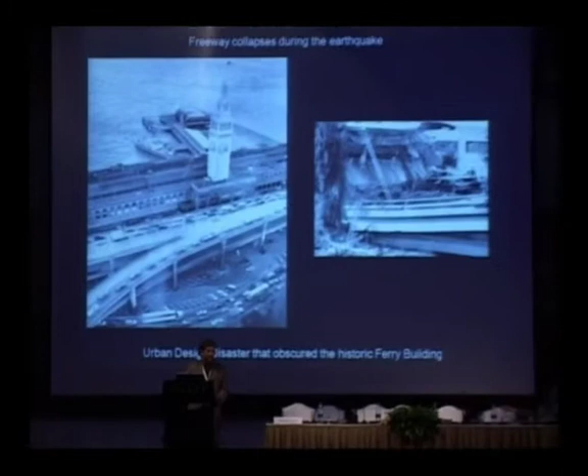And what really transpired was the area in the middle there, which was a series of elevated ramps, got demolished in the course of a planning process. It took a long time, 85. Citizens in the city really were talking about could they remove it, and then they decided that they couldn't remove it, but the earthquake was a precipitating event.

Columnist Herb Caen always thought San Francisco was one of those places where Manhattanization was a bad thing, and now we're looking back 20 years later and talking about very tall buildings in terms of San Francisco, clearly not in terms of what we would see here in Dubai, and so height's a relative thing here. You see in this diagram here over the four images the way the city's evolved in this height dialogue, and it's really been pretty dramatic, and it's really accelerated significantly in the last 20 years.

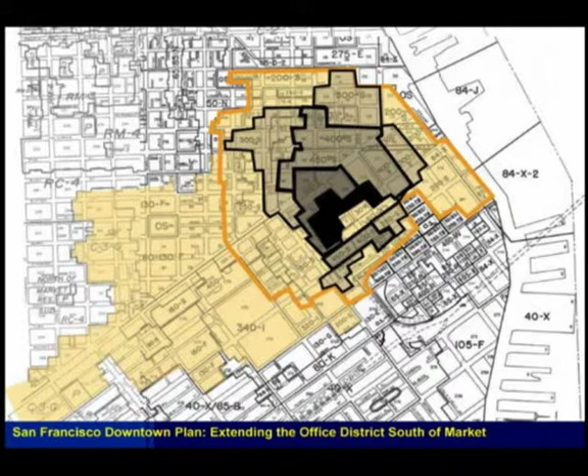The area that we're really going to focus on is the area around the downtown core, and the core discussion started in 1985 with the downtown plan. It was centered around that black area, and there was a desire to really move some of the development that had occurred north of Market to the southern portion of the area with the financial district. And the discussion then, as this ramp, which you see in the middle there, got demolished, two areas got created, and I'm going to talk to these. One is Rincon Hill, which John touched on, and the other one is Transbay.

So the first thing that happened was the waterfront got changed, the elevated freeway got changed, parkland got created on that waterfront. Pedestrian experiences were created, pedestrian was emphasized, and a lot of the pedestrian character that's really important to the character of the city, which is a city of only 800,000 people, a world city that a lot of people really love to come to because of its pedestrian character. And so the area on the left that you see there, again, is something that has not yet happened now, and we're about 1995.

So in 1996, the city began to think about a plan for both transit in the core of the city in terms of bringing mass transit there in a more significant way, and the development of two adjacent areas. One was Rincon Hill and one was Transbay. Two separate agencies actually, remarkably, were charged with two different parallel courses. One was the City Planning Department, who was charged with the review of Rincon Hill, and the Redevelopment Agency with Transbay in terms of the ability to get revenue for that area in terms of its development.

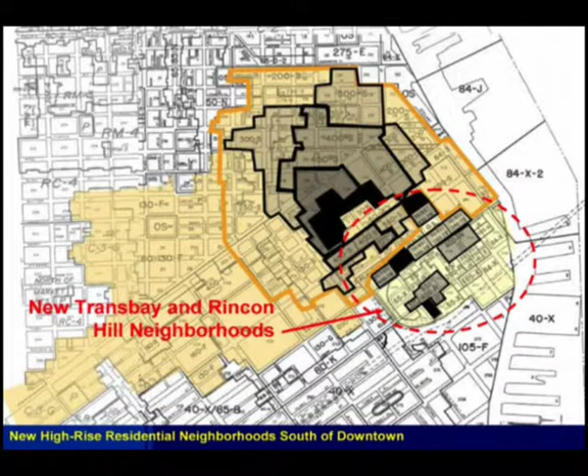The area that's in the red zone there is the Transbay and Rincon Hill combined areas, and you see actually that it's now south of where the central core of the commercial district was evolving, and so it was seen as a new residential enclave. Two dots there, and I'm going to touch on the two projects that precipitated this, and they actually were prior to the ones that John's firm were dealing with because they were done before the zoning for Rincon Hill actually started. We started this project in 1999, almost 10 years ago, and the project's actually finally coming online.

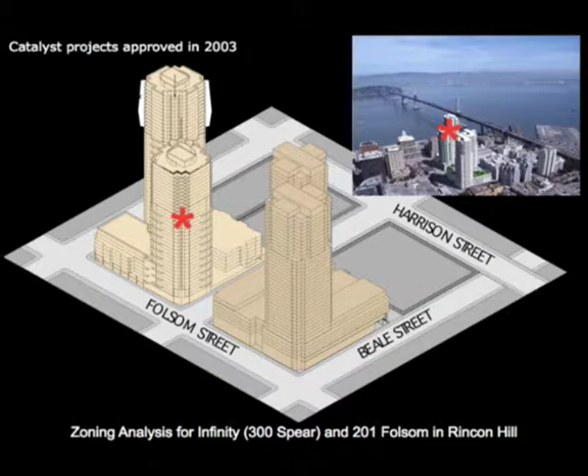And the desire to increase heights by almost twice, from about 200 feet to 400 feet, was really seen as a very difficult discussion for the community. I spent 80 community meetings in the course of a 3-year period going around the city talking to people about why it was important. A lot of them understood, a lot of the environmental community understood, but they were still concerned about the desire to increase that height.

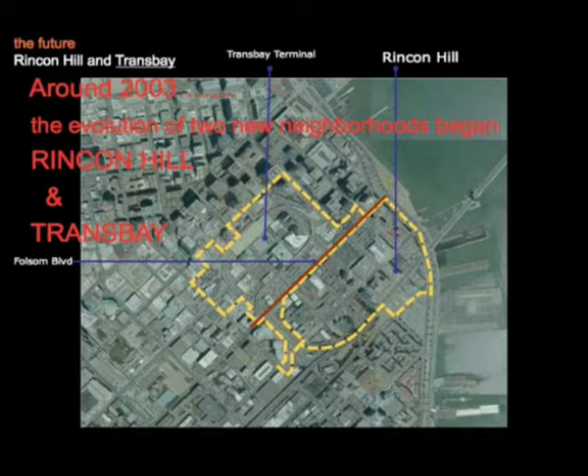So now we're at about 2003, and the redevelopment plan and the Rincon Hill plan became much more of a public discussion, and these are the areas that John had touched on that were part of this discussion, and they were important to this dialogue. This is the area as you saw it before the development occurred.

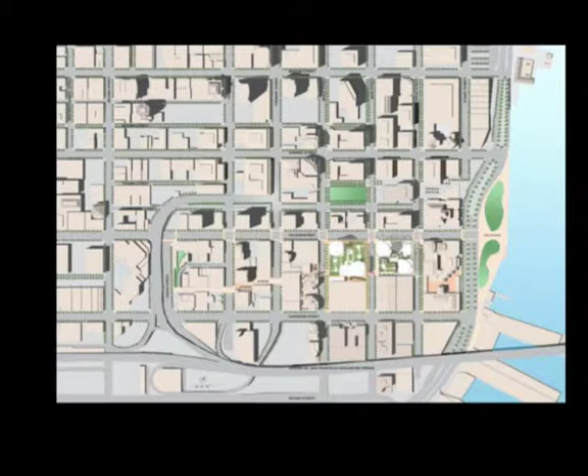This is actually what's begun to happen here, and the areas that begin to see is the development of parks, the creation of a retail boulevard along Folsom Street, which runs to the waterfront, and the development of several residential projects. Three of them, Millennium, Infinity, and One Rincon, are the major projects that have actually started in this area.

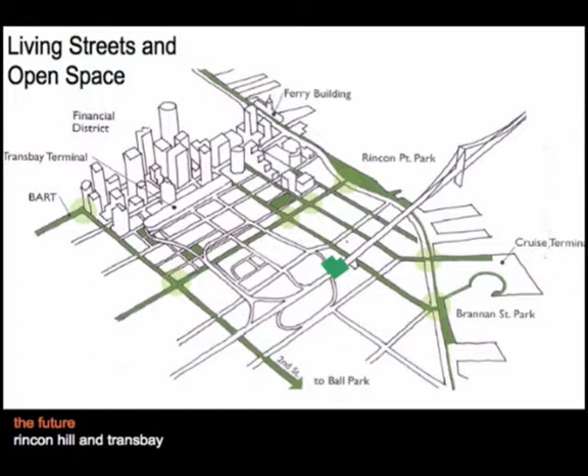So again, Rincon Hill, you see the rendering on the right that the area was focused on. It was part of the vision of the city. This is that creation of that boulevard that actually ran down to the waterfront from the area that was west of the commercial district, the creation of living streets and open space. That was an important part of what didn't typically occur downtown. This was a change in the mindset that actually people could live downtown and create a new residential enclave.

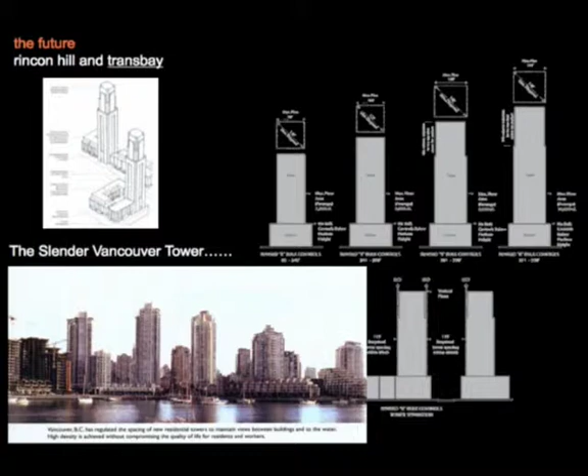And then one of the discussions that actually occurred early on was the discussion about the size of the buildings and the floor plates. Planners in the city actually felt that the Vancouver model was something that was important to do, and you see the massing and the size, but they were very thin buildings, which is really a difficult thing for developers, as well as a very difficult thing to accommodate in this development of this performance-based structural system, which Ron touched on. And this project, Infinity, was actually the first to use this system and the first to be constructed. One Rincon benefited by this because we took a lot of the effort here.

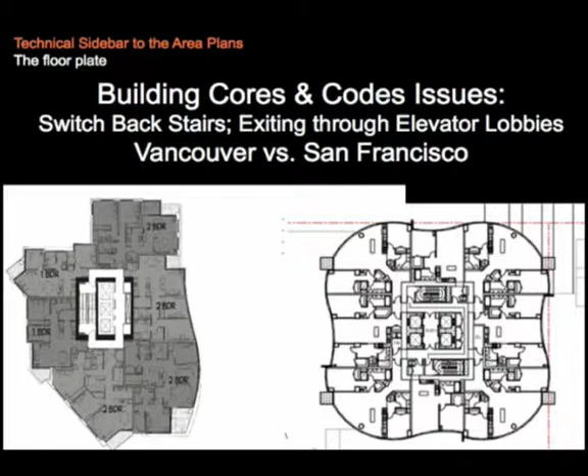And the diagrams that are on left and right, one shows the Vancouver model, which permitted switchback stairs and exiting through elevator lobbies. The San Francisco Code did not permit that to happen, so therefore it meant that the floor plates actually were bigger than they could be if the planners were actually looking at the Vancouver model. They didn't quite understand that the building codes were part of that discussion.

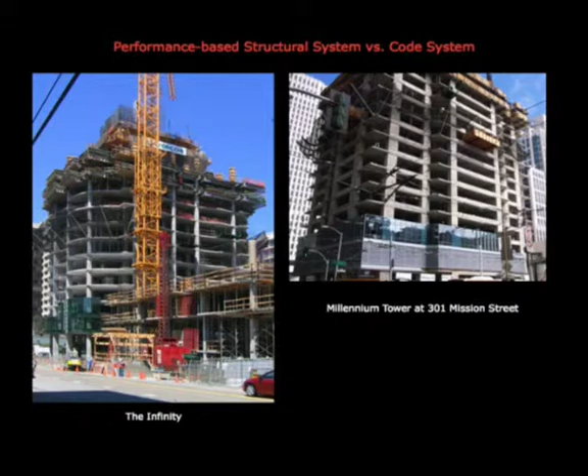This was also the comparison that I think is important that Steve talked about here, the Millennium Tower and the Infinity Tower, about the perimeter beams. Ron and I had worked on a project much smaller in scale, 240 feet in height, that had no perimeter beams. And I felt in the course of the development of this project that it was important that we did not have those perimeter beams. We wanted the greatest flexibility that could occur. And it took almost 3 years for the building department to actually understand and give us a yellow light about the approval of this project.

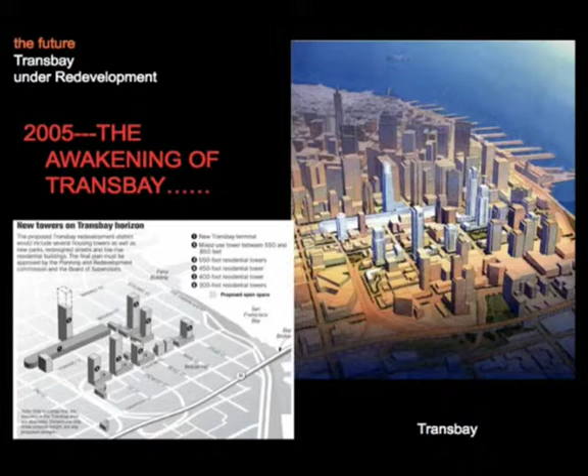Jeff will touch a little bit more on this in terms of the development of Transbay and how it ultimately will evolve in the changing of this area. And so we're at about 2005, the importance of the streetscape that we talked about. And now we've sort of advanced the discussion. The height is a better thing. The development of this area is important. And now the city's in the process of looking at bigger and taller buildings.

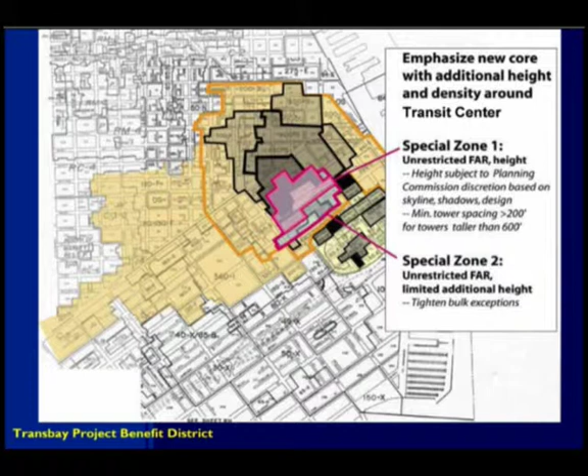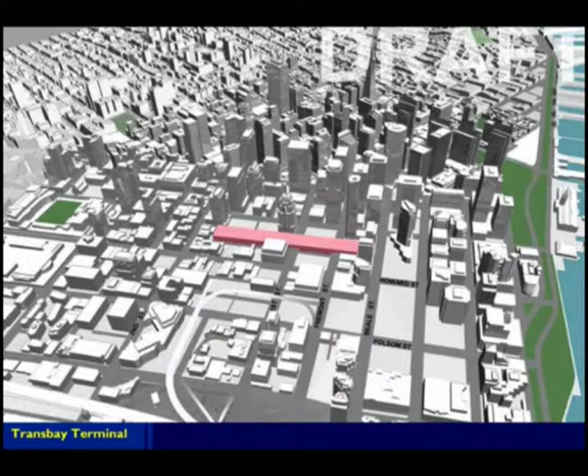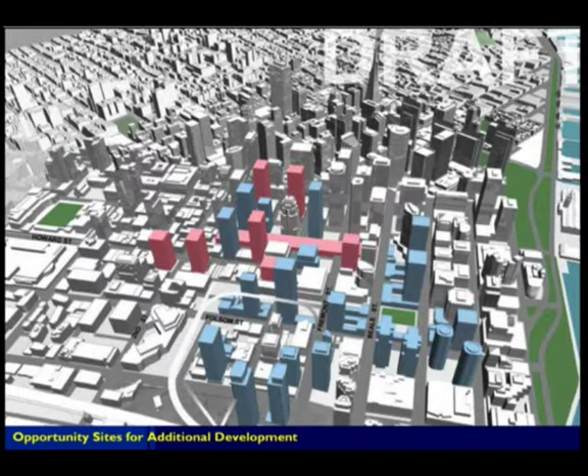Jeff will also talk about the transit tower that's a part of this discussion, a competition that was recently won by Hines and Pelli to build a building of probably somewhere around 1,000 feet. So that's a big change in the mindset. And you see this form of the building and the tower. This is really that sequence of images which I always thought was important in terms of the way the city began to think about the development of the base, the entitled towers, the proposed Transbay towers, the opportunity sites that they thought for development, and ultimately a balance of what they thought the development is.

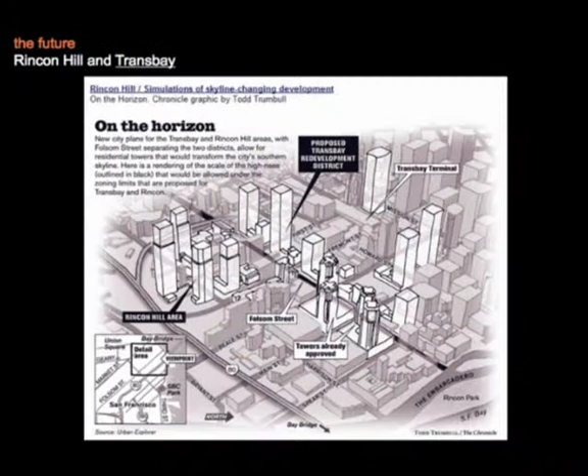So in the course of what I would describe now as a 20-year process, from the removal of an elevated freeway to development of increased density in the core of the city was actually very important. So the city followed the intent, and I just want to go back to the thing that John talked about, which I think is really important in the way the city is seen: suburban versus urban.

The density on the Infinity site, which I'm going to talk about, is 660 units to the acre. And so if you compare the single-family house, it's significantly better, and the city is now beginning to attract a lot of people in this area.

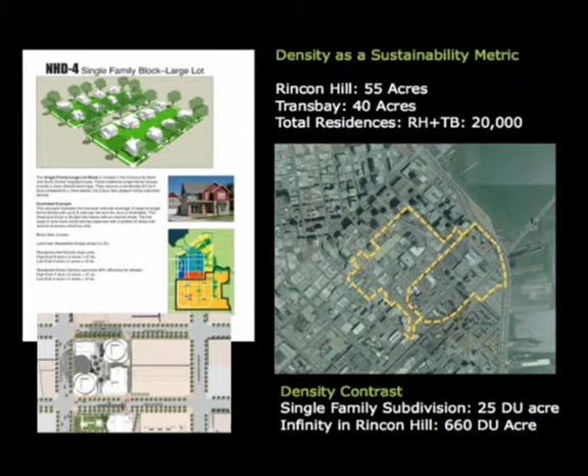So this is a little discussion about the Rincon Hill area in Transbay, what has occurred in the area. You see how many of the open lots were there prior to the development. We're just sort of working our way around it. And this is a series of animations that the city developed looking at the key vantage points. So this is the baseline.

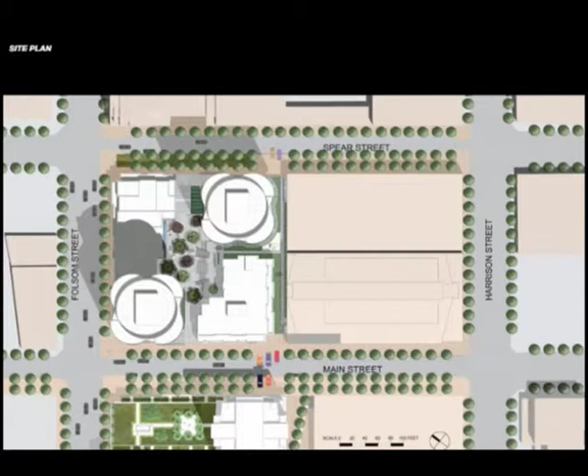The Infinity Tower, which I'm now going to touch on, is one of the projects that is a part of this, and this is a shot taken from One Rincon on a visit that Jeff and I had the opportunity to make. It's a 660-unit project, about the same scale as One Rincon. Two towers, two mid-rise buildings, an open space in the middle of the courts, and five levels of parking below grade. Very, very dense project, very unusual, very big for the city.

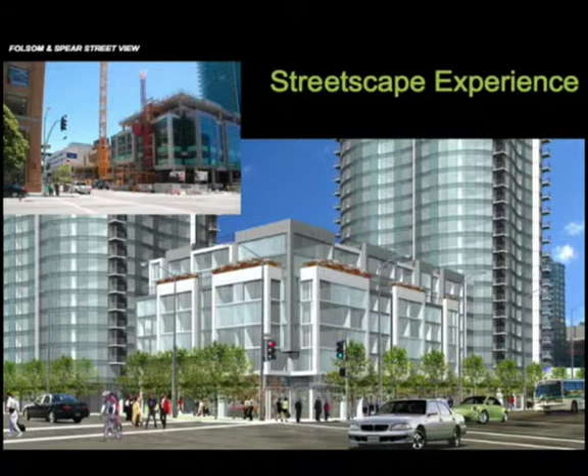And it allowed, as you can see, the use of this curtain wall, which gave flexibility for the unit configurations. And you can see the character along the street was really important to us in terms of the way people moved around the site. This is one of the ground floor plans. This is the courtyard plan in the middle, the way the space is created between the buildings. And then some views from the streets and the in-progress construction site, and a view looking down Folsom Street. Remember, I was talking earlier about that view.

Next thing I just want to touch on briefly, which I think is a really important part of this Congress, is sustainability, what ordinances are about and why incentives are really important. We heard the presentation earlier about Chicago. San Francisco is seen as the #2 city in terms of green, and what has been interesting is watching land use zoning create the ultimate goal of what sustainability is about.

In the last year, the city and the mayor put together a task force of community, construction, architects, engineers, and people who could provide insight into what sustainability meant. We'd always been on this course to making it a sustainable city, but this is a concrete example of where this implementation could occur.

So when you look at this chronology that goes back to 1997, each one was about the way the sustainability plan occurred, and the most recent one provides incentives for private sector owners to decide to do their building as potentially LEED Gold. The incentive legislation is in the process of being considered by the Board of Supervisors. The intent, obviously, is to reduce greenhouse gas emissions as well as primarily energy.

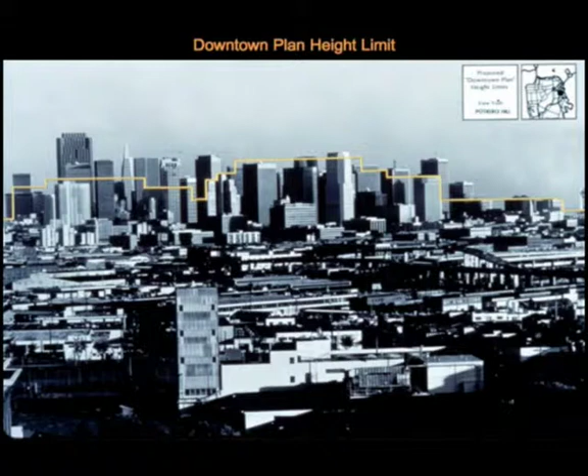Its zoning over the last couple of decades up to now has been about preservation of what's there. The project that Clark talked about, which was the Infinity, done by our office with Arquitectonica, was a ferocious fight over a 400-foot height limit. And as you'll see, that height limit became quite irrelevant when the idea of sustainability of the planet became a more important issue than whether or not your backyard was imposed on by somebody else.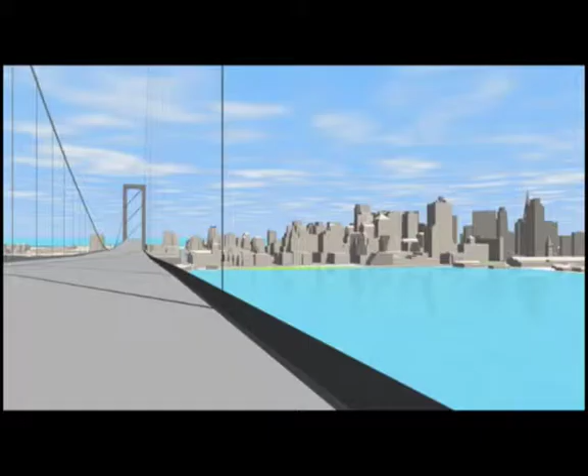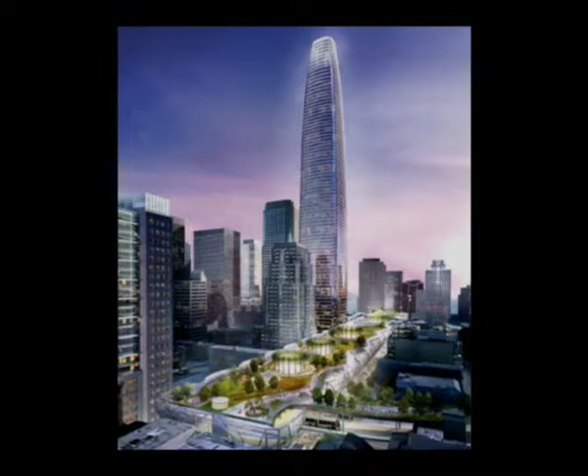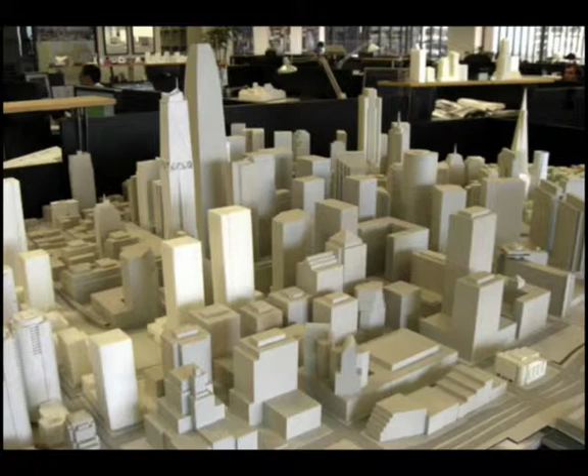So the studies in the city, which first were here, now contemplate taller buildings, and you'll see taller yet. And it's because of the notion of sustainability. The Transbay Plan itself, which was like this, is really quite modest in light of what has now happened. And we have here a 400-meter building by Hines and Cesar Pelli, where before 600 feet or 200 meters or just below that was contemplated. In our office, we have a model of all of this, and you can see that the scale is jumping in San Francisco, and it's about, again, high-rise and quality of life in urban centers to help preserve our planet.

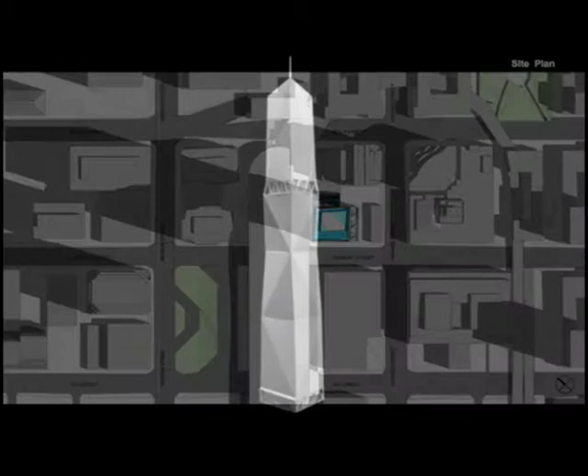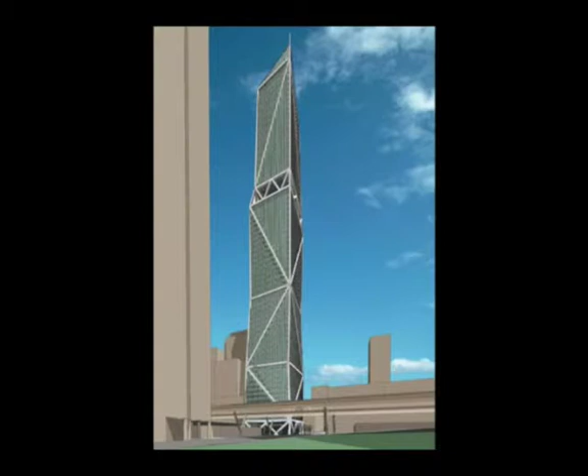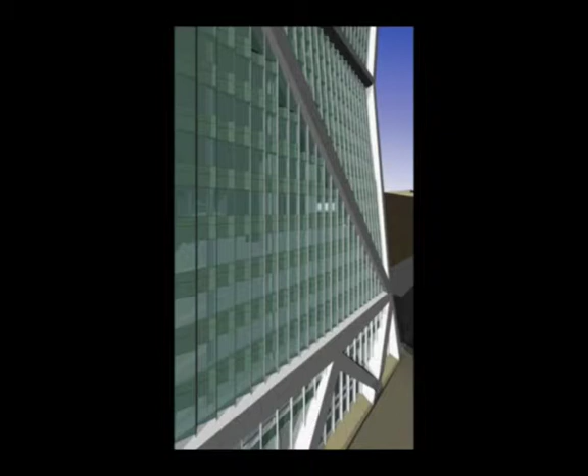Now, this is a fairly recent project by us. This is about 300 meters tall, and it's right near the Transbay Tower. And the idea of the project here is that it steps down from the Transbay in urban design to create a transition. And here it is immediately south of the Transbay Terminal itself. And the concept of the building is an exoskeletal building. It's a seismic zone. It's a very small floor plate. So we're expressing the structure on the outside of the building in order to have column-free space inside. It's mixed use, probably office with residential above, perhaps hotel also. And to emphasize the exoskeletal structure, we have this subtle shifting of the planes and surfaces of the building to give a bit of character to that structure.

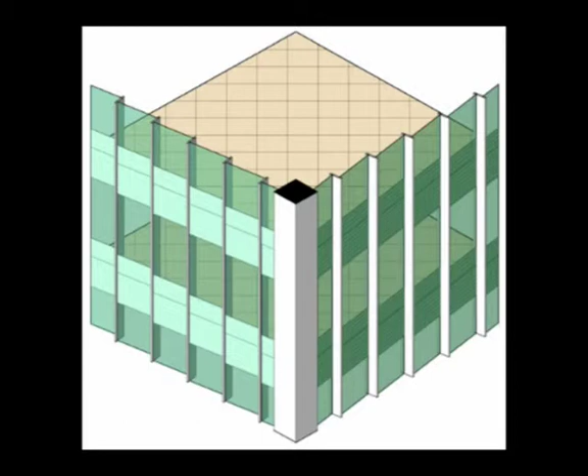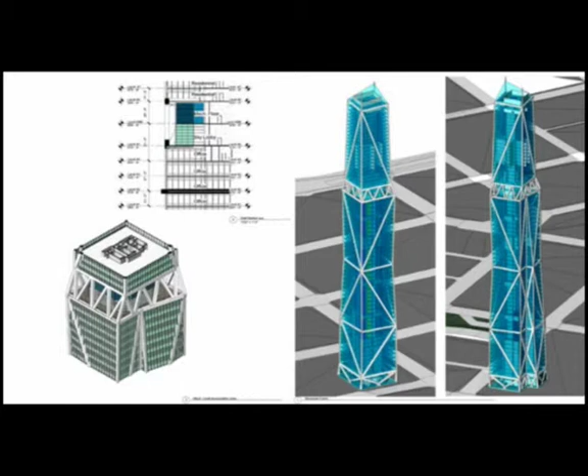The other idea we have going for this building is that we have a serrated wall, and the reason for the serrated wall we've designed is that the sun strikes the mullions to a higher ratio than the glass, and this we've calculated to save about 6% on the energy for the building. And we also are taking advantage of some of the recent wind studies, so we create a funnel through an amenity floor to break up the wind currents and reduce the stress on the building and do some wind turbines. And here you can see the way the plan transitions through the amenity floor from the base to the top, the middle of the building at the amenity floor.

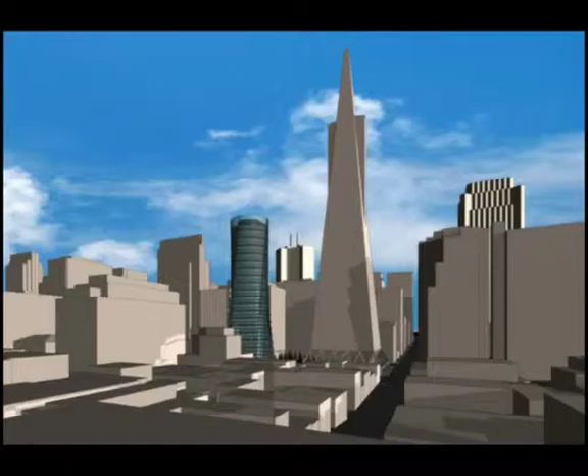And then one last quick project. This is not so tall, but again, being very respectful. It's on the right there near the Transamerica building, and yet creates a whole series of sustainable statements in a residential tower, which does a quarter twist as it transitions from the bottom to the top. And you can see the way the geometry created works fairly sensitively with the edge of the Transamerica building while not mimicking the building. There it is in its context.

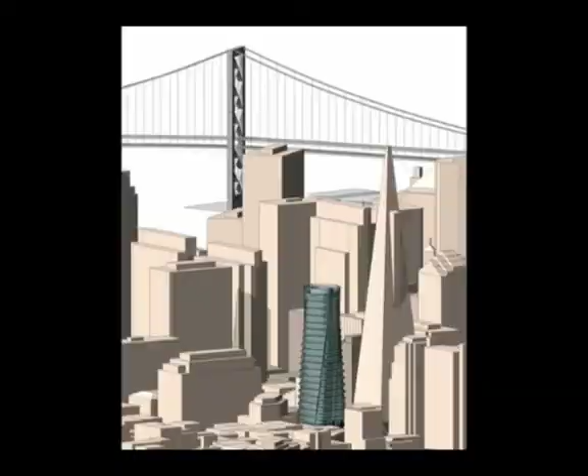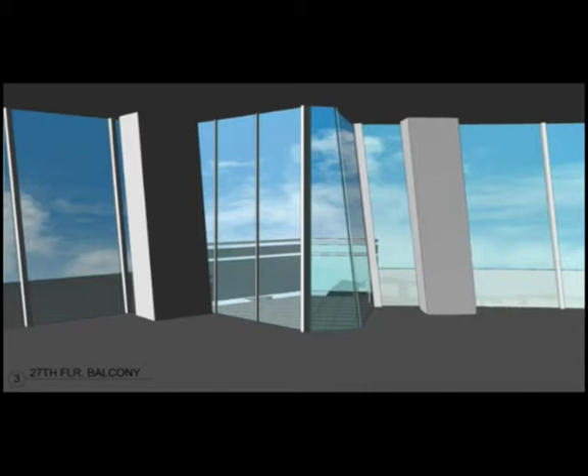And here you see the way that transitions from the square to a round, resulting in a building like this, which means that the park space is kept quite open, the sunlight is kept quite illuminated, and creating interesting geometries from the inside looking out, where the vertical glass is where the doors to the balconies are, but otherwise we work with the geometry of the idea. These are some studies of the building in context. As Tim mentioned, this is a very contextual city. And then in the park, we open the park up more because of that.

Let me just go back to this, and I'll close there in the interest of time, and say I was talking to our colleague Igor Tartakovsky, and one of the other things is that a round building presents less of a face to the sun. It's a more efficient volume, so there's less perimeter as well. So there's considerable savings just by virtue of the fact that it's a round rather than a square or rectangular building. With that, I'll stop.